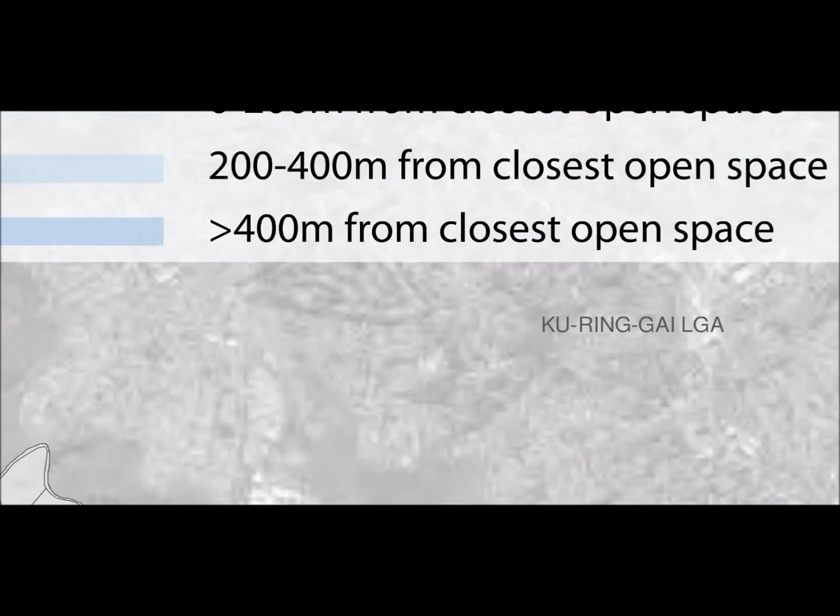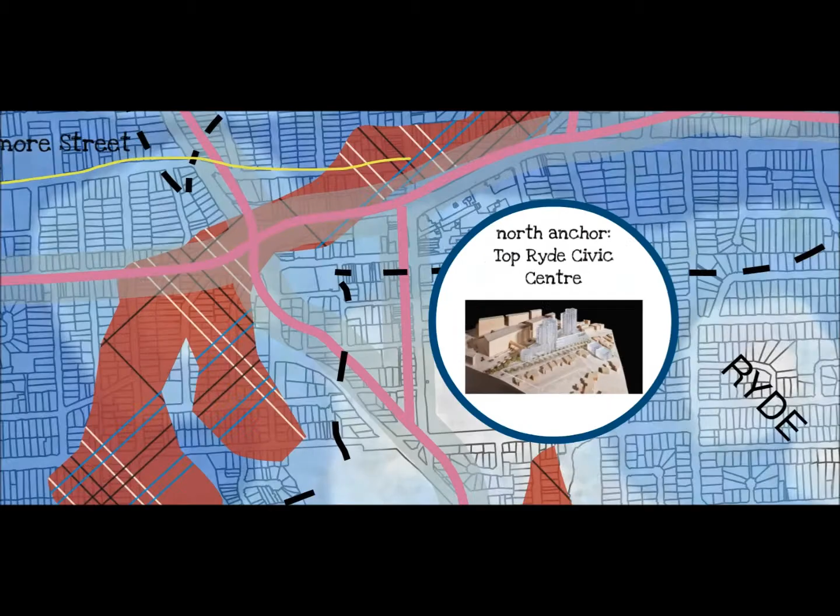The River to Ryde project also responds to strategic planning. The Ryde 2021 Community Strategic Plan speaks of connecting missing links in cycleways and collaborating with partners to forge a transport linkage between Top Ryde and Meadowbank Station. The Integrated Open Space Plan identifies a need for a recreational linkage between Top Ryde and the Parramatta River, connecting with existing open space resources, and includes a diagram identifying areas of poor access to open space. One such area is this strip from Top Ryde to the Parramatta River via Belmore Street. The north anchor is the Top Ryde Civic Centre development proposal, a controversial proposal of hundreds of new apartments, a council chambers and a performance space.

The south anchor is the Ryde Riverwalk project, recently completed, an upgrade to this public domain, to the wharf, which is not currently on the ferry wharf system, and an upgrade to the cycle path, a regional cycle link along the Parramatta River. What other cycle paths traverse the River to Ryde precinct? In answering that question, looking at regional and local cycle networks, we begin to see a metropolitan consequence of the River to Ryde.

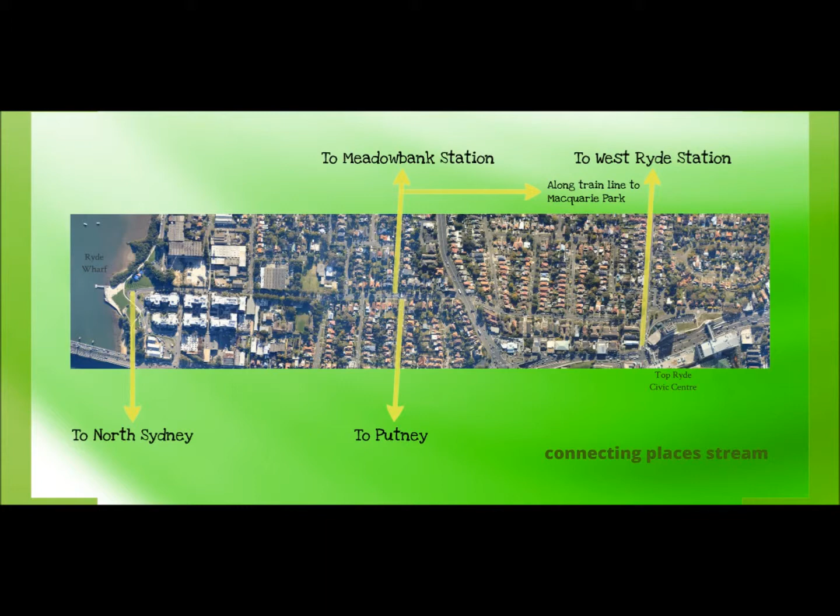With respect to the Connecting Places stream, the River to Ryde precinct engages with the existing on-road cycle path extending from Top Ryde to West Ryde Station, to Putney and to Meadowbank Station in the opposite direction. From along the rail line, one can access Macquarie Park. Our regional cycle link along the Parramatta River connects us to North Sydney in one direction and to Parramatta in the opposite. Crossing the Ryde Bridge allows for cycle access to Rhodes and to the Cooks River cycleway beyond.

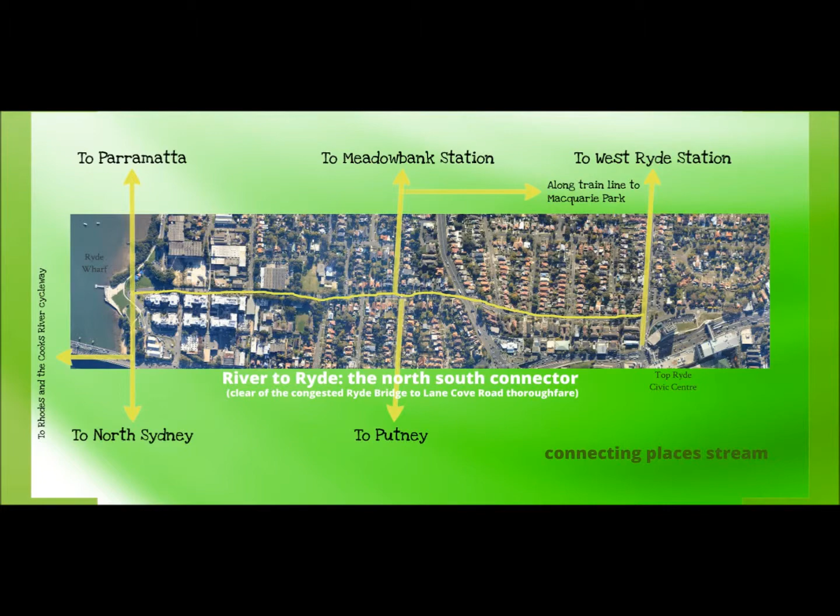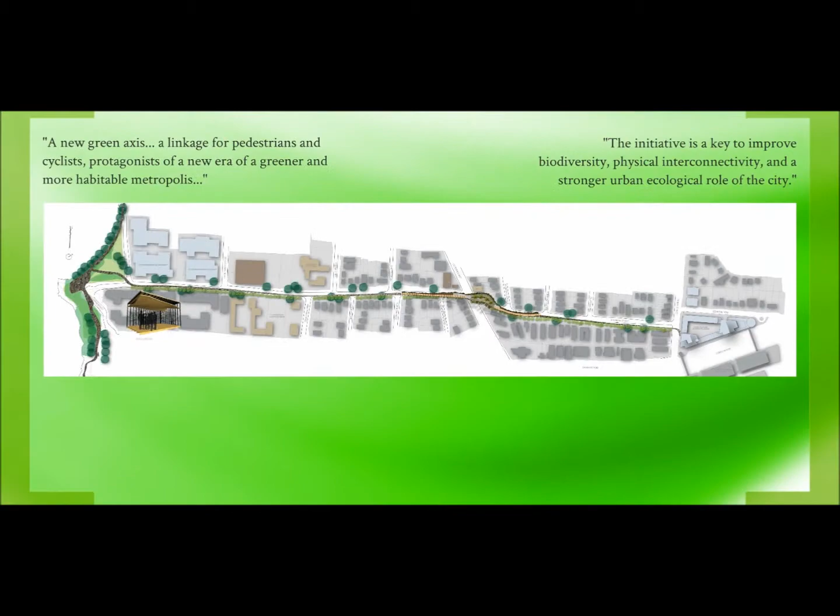The River to Ryde acts as a north-south connector between these routes, clear of the congested Ryde Bridge to Lane Cove Road thoroughfare. The project presents a new green axis extending from the Parramatta River to the heart of Top Ryde. It serves as a linkage for pedestrians and cyclists, protagonists of a new era of a greener and more habitable metropolis. You'll notice that the path crosses Victoria Road, not currently crossable either by cycle or pedestrians.

And so, the central anchor of the River to Ryde project is a green bridge spanning Victoria Road and reconnecting the two sides of Belmore Street. This bridge affords views towards the historic precinct adjacent, including the Ryde Police Station, as well as views to Sydney.

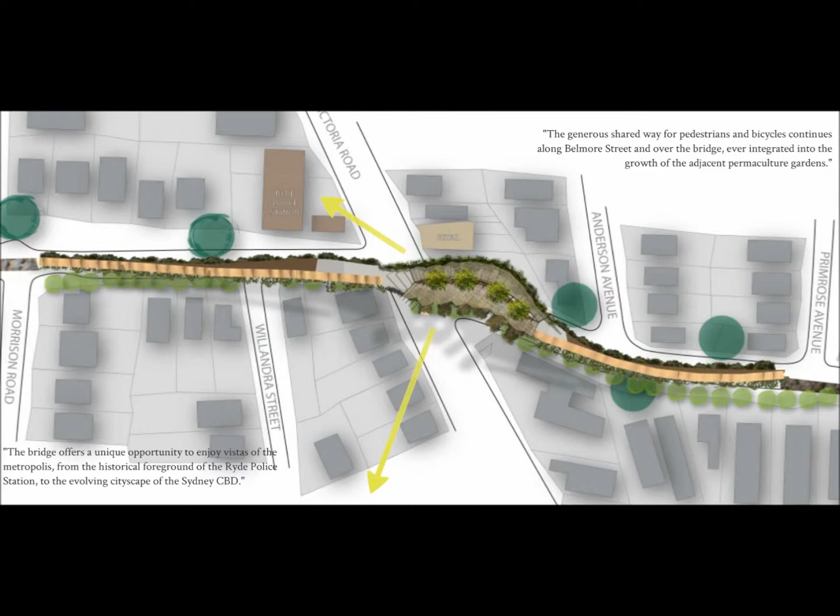And so we see that there is a duality at play in the River to Ryde project. There are the hard elements like the bridge over Victoria Road and the shared pedestrian cycle path put into place. Then over time, the soft elements driven by the local residents grow.

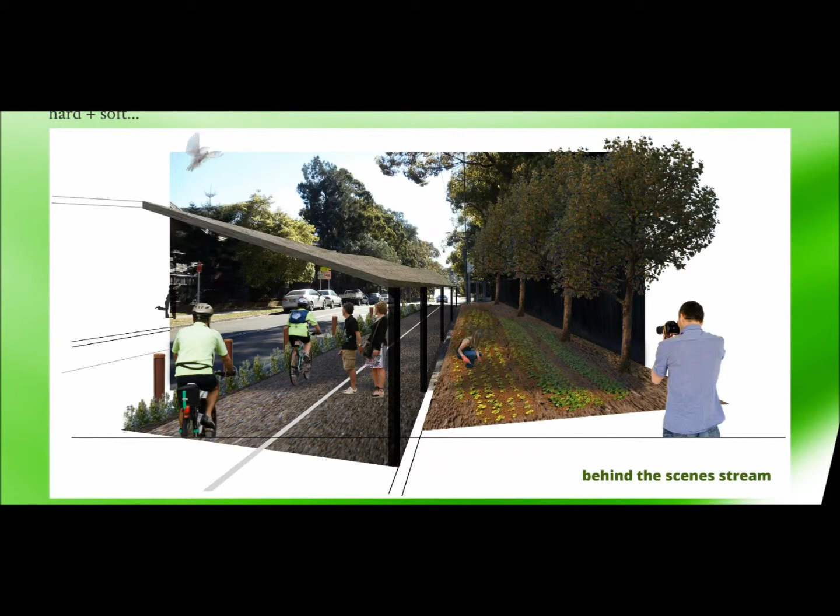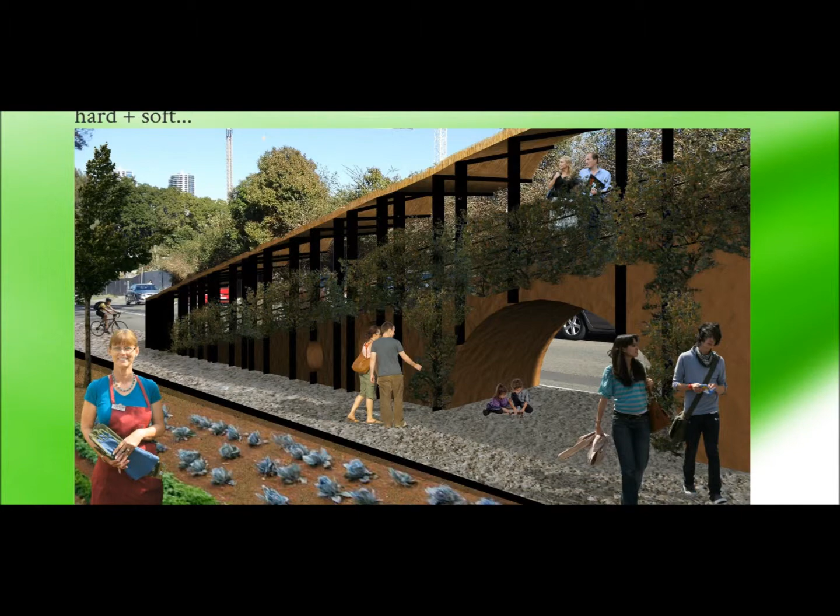Let's look at some examples of duality in the River to Ryde project. Here is Belmore Street, and here it is activated with the shared cycle pedestrian path and permaculture gardens run by the local community. Again, Belmore Street at the point where Victoria Road descends to meet the ground, and there is that hard element adjacent to these soft elements of permaculture gardens growing over time. So the local residents are driving these soft elements of permaculture gardens and seedlings of activity, pavilions that are kit of parts. These pavilions are selected in terms of their use and location by the local community. Barry may establish a seedling of activity as a nursery.

Margaret may establish a pair of seedlings for cooking and eating the River to Ryde produce, whilst Bev may simply be interested in a seedling as a meeting point in her bushland corridor. Rosemary, representing Permaculture Sydney North, may occupy one of the seedlings on the Green Bridge itself for permaculture education, whilst Hayden may be all for a seedling established as a bike hub.

In the parkland at the termination of Belmore Street, Permaculture Sydney North have set up a seedling of activity, activated every Saturday morning for the sale of native and food-producing plants for growing along the River to Ryde Permaculture Garden strip. On the remaining days of the week, this pavilion is well utilised by locals who set up a table for dining, being near a public barbecue.

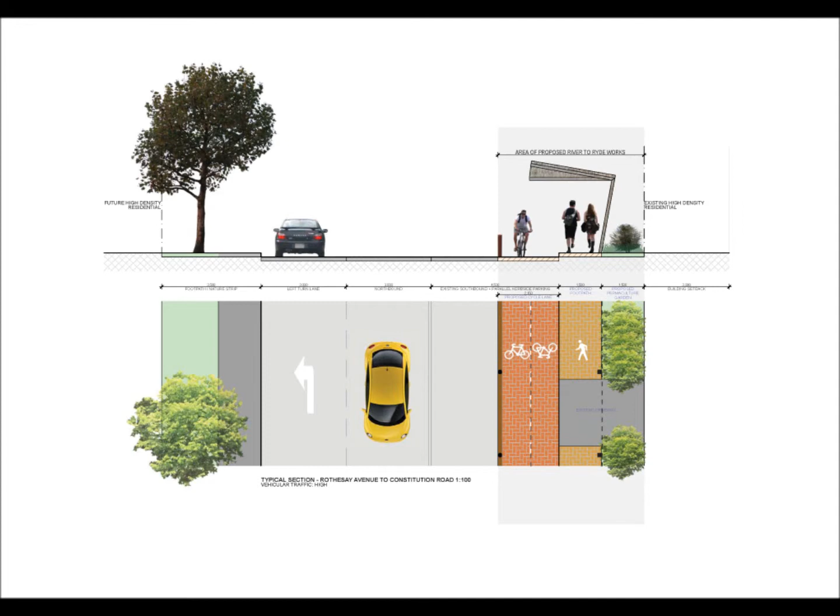Let's begin with the River to Ryde shared cycle pedestrian path on Belmore Street. We can see that curbside parking in one direction has been removed to allow for an on-road cycle route, with the adjacent footpath reconfigured to the curb edge to maximise permaculture gardening space. With the base of the footbridge shown in grey, the footpath widens to the width of the footbridge where cyclists can mount the curb to ascend the bridge.

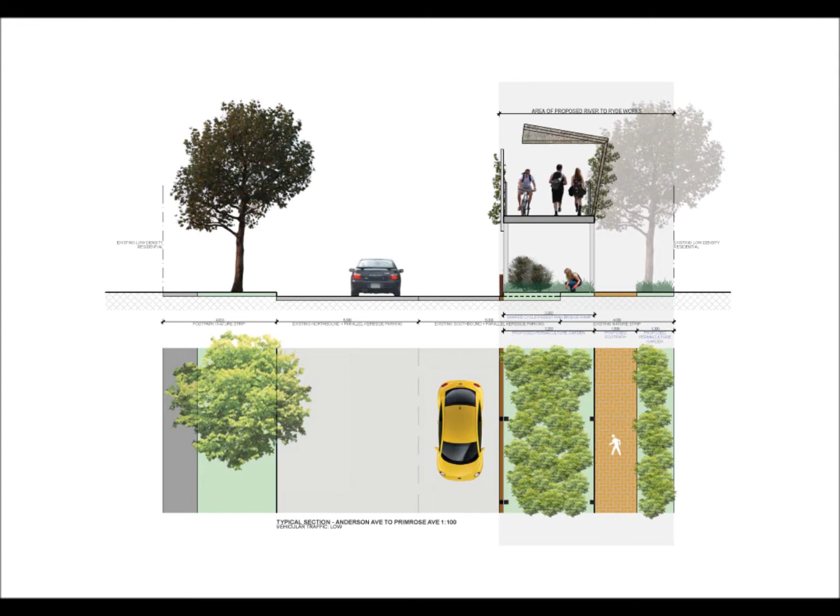We can see a seedling of activity has been nestled amongst the permaculture gardens here. On the north of Victoria Road, the footbridge descends over, being open below for permaculture gardening. The footbridge has thinned the road width and will connect to the on-road cycle path ahead.

And now let's continue with the pedestrian bridge over Victoria Road, a beacon of urban ecology acting as a placemaker for Ryde and its interest in a sustainable future, visible to the over 50,000 vehicles passing below each day. Unlike an on-grade crossing, the act of a bridge achieves a place-making identity for the people of Ryde, as well as being a destination in itself.

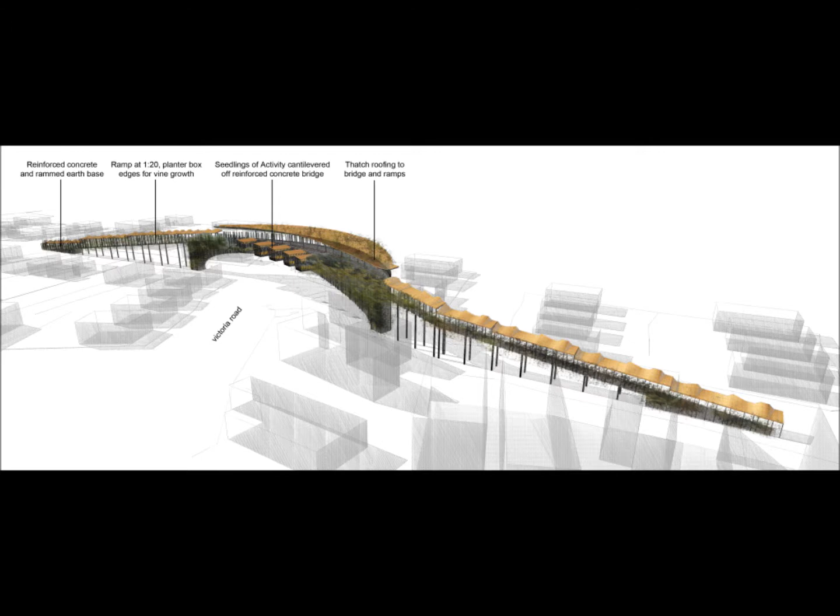The Green Bridge is as much a place to stop as it is to traverse, affording views across Ryde's heritage precinct and as far as the Sydney CBD. Rammed earth at the ramp entry points, planter boxes at edges for vine growth, cantilevered seedlings of activity, thatch roofing throughout, open colonnade below, stitching the severed Belmore Street for cycling.

To the plan now, the ramp at 1 in 20, seedlings offering opportunity to stop and view, fronting tiered seating, the seating centred between a meandering lane and a fast lane for commuters, the fast lane on the left in this section, adjacent the tiered seating, fronting the meandering lane, which feeds into the seedlings, a meeting point for friends.

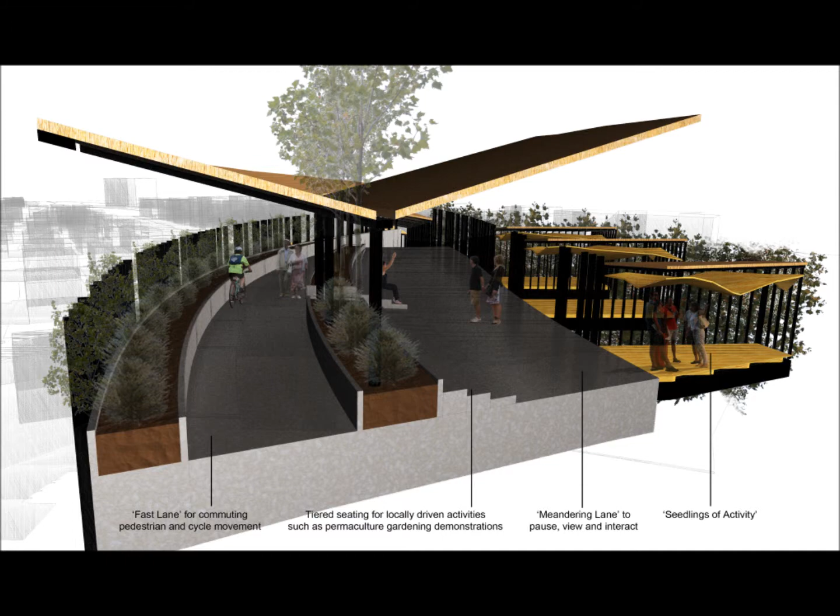Planting along the permaculture strip is proposed to be managed jointly by Permaculture Sydney North and the local residents immediately fronting the River to Ryde continuous productive urban landscape. Individual plots along the permaculture strip are divided according to the width of the property frontages and are planted by the adjacent property owner or via a land share system whereby owners can invite interested citizens of Sydney to activate their plot. Plants can include dwarf fruit trees, particularly citrus varieties. These can be underplanted with herbs and native flowers to attract pollinating insects.

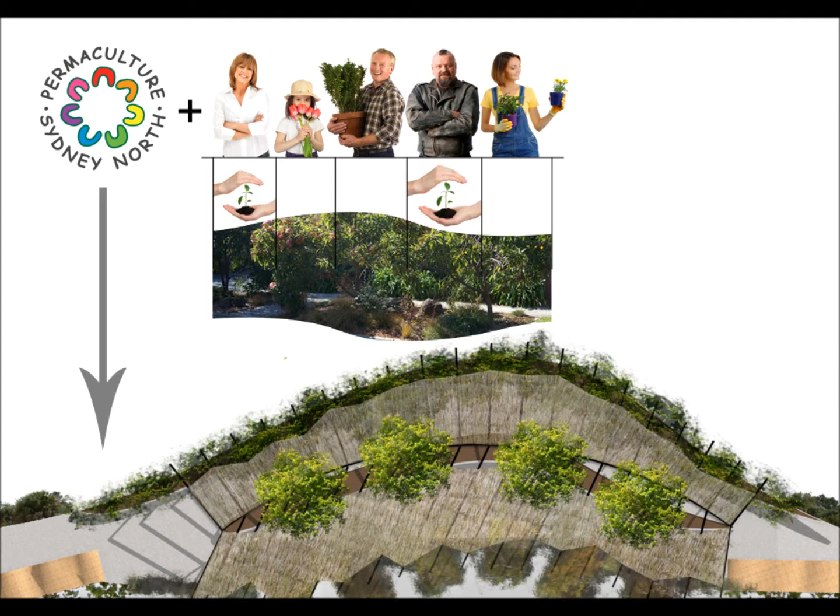Planting on the bridge will respond to the predominant vegetation indigenous to the Ryde area, being turpentine ironbark forest, supported in soils derived from Wianamatta shale. The limited number of trees within the central planter bed may be cheese tree, blueberry ash, or yellow tea tree, with a wide variety of ground cover and grasses growing in, over, and around the bridge, including Peru lily, Dianella, purple twining pea, Lomandra, and wonga vine.

And so from the site of the Top Ryde Civic Centre, thank you for joining me in my River to Ryde journey, an urban architecture project that begins and ends with the local residents, grounded in connectivity and inspiring a stronger urban ecological role of the metropolis.